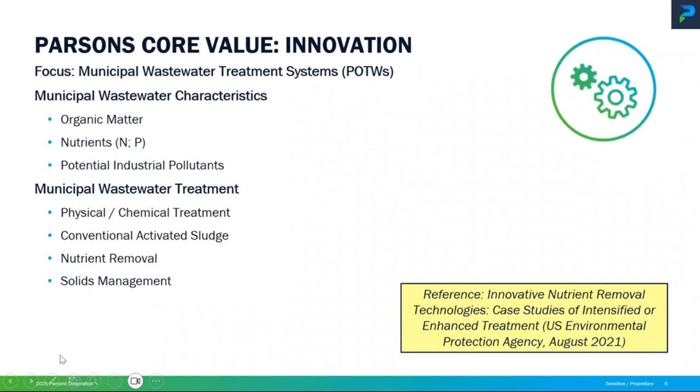Some of the innovative developments in wastewater treatment are listed here: water reuse. Parsons has been involved with significantly large water reuse projects, I believe one out in Los Angeles where water is a scarce resource. So something like water reuse does provide substantial environmental and societal benefits.

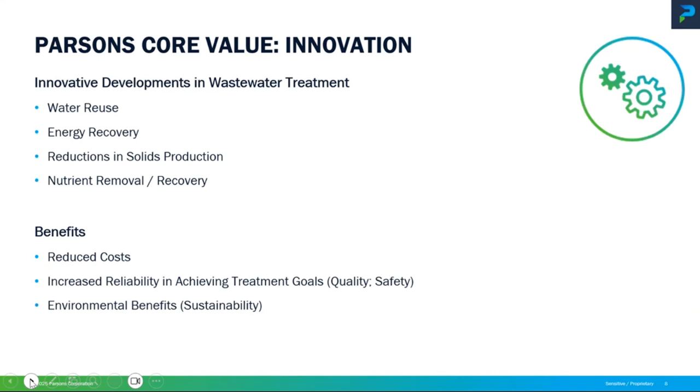Just a brief example of innovation in municipal wastewater treatment: it has to do with nutrient removal. Nitrogen typically comes in the form of urea or ammonia. Processes which deal with these include nitrification, which is an aerobic biological treatment process. So if the system is already treating the wastewater biologically to knock down the organic content, you could also have the system designed and operating to knock down ammonia using aerobic processes.

That, of course, means you have to supply oxygen. Nitrification is energy intensive. It generates sludge because of the bacterial growth, and it consumes alkalinity, which means you have to monitor your pH and replace caustic, for example, to maintain your pH. So that provides a demand on chemical use, specifically something like sodium hydroxide.

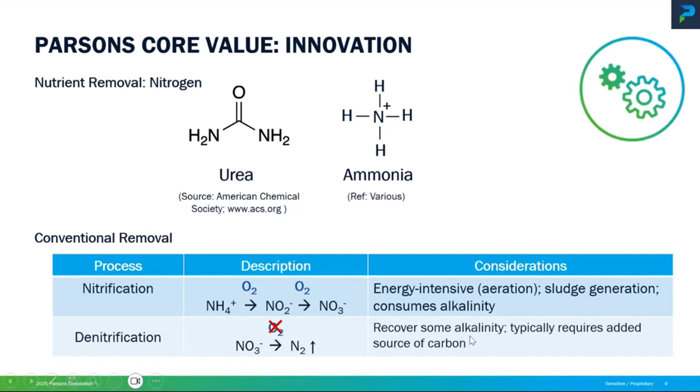Denitrification is another process where, if you have a nitrate limit, nitrate being NO3 minus, you may be required to reduce that. A typical way is through denitrification, where bacteria degrade an organic source, sometimes added, and this is done in the absence of oxygen, converting nitrate to nitrogen gas, which evolves to the atmosphere. One benefit is that you recover some alkalinity, and sometimes that can drive inclusion of a denitrification process in your treatment system.

So I've been demonstrating that nitrification in particular is an aerobic process. Aerobic treatment, or energy in general from municipal treatment, can consume up to a third of a municipality's total energy bill. So that wastewater treatment plant down the road may use up to a third of the entire town's energy for all their needs. The energy used for the aeration process within that treatment system is about 40 to 70%, and it may be towards the higher end of that range when you have nitrification.

One innovative process I found in that reference is called anaerobic ammonia oxidation, or Anammox. As shown before, the nitrification process is energy intensive to provide oxygen, converting ammonia to nitrite and then into nitrate. What the anammox process is able to do is take a slipstream of this water with the intermediate nitrite and apply it directly to the ammonia. So instead of requiring oxygen to oxidize the ammonia, you're using the nitrite, which actually converts the ammonia directly to nitrogen gas. It's just an example of an innovative process with nutrient removal on a municipal treatment system.

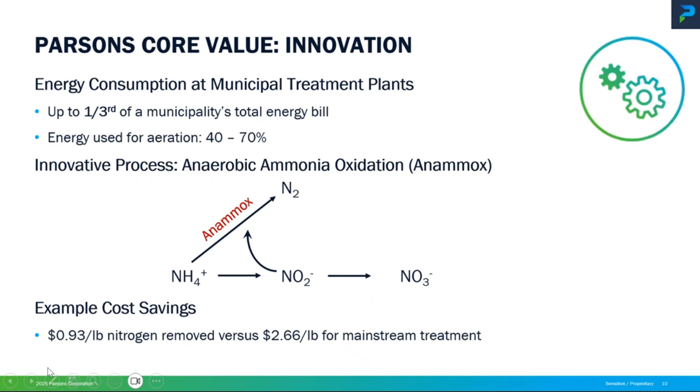So now on to the main topic today, where I'm going to be talking about the retrofit of an existing groundwater treatment plant using native iron to address 1,4-dioxane. I'll briefly introduce the treatment system, talk about the investigation which led to the selection of an alternative to explore for treating 1,4-dioxane within the existing treatment plant, how this was implemented at full scale and demonstrated during startup and operation, and then we'll end with a Q&A session.

So just a brief introduction. The groundwater treatment plant is located in New Jersey. It was not designed by Parsons, but by the previous client's primary consulting firm. Parsons was awarded the contract with the client and took on managing the construction of the treatment plant in 2010. The plant construction was finished in 2011, and then Parsons was tasked with starting the plant up, which we did in late 2011 and into 2012.

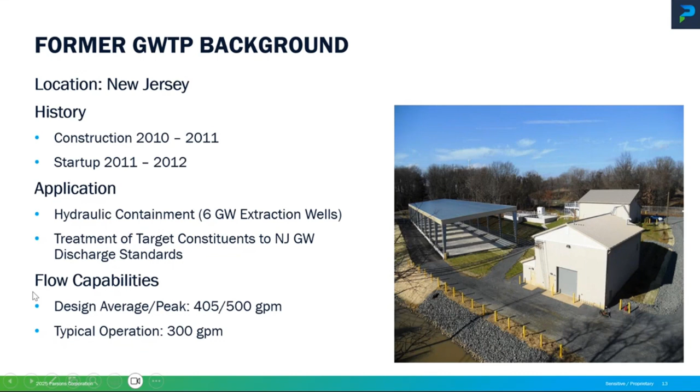The target constituents for which the plant was designed include nuisance and target metals, so this includes iron - they have a fairly large iron load from the groundwater. They also are beholden to treat aluminum, manganese, and arsenic. They treat vinyl chloride, and they treat perfluorooctanoic acid, or PFOA.

So I show a block flow diagram of how the treatment system operates. The flow from the extraction well, the pH is raised, and it's also aerated, and this is to oxidize the iron to allow it to precipitate. This water with the oxidized iron then goes into a chemical mix floc process, and then a plate settler where the pH is further raised to make sure the iron is completely precipitated. Then you hit it with a polymer to agglomerate those precipitated solids, and allow them to settle.

The solids are managed through the sludge underflow, which is pumped to residual settling basins, and then they're managed further from there. I won't get too much into that beyond for the rest of this presentation, but just wanted to point that out. The treated water proceeds through this.

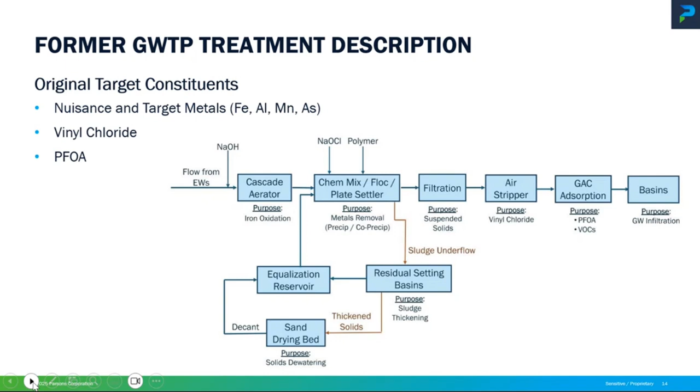So as I mentioned, the treatment plant was designed and built in 2010, 2011. Around 2015, New Jersey established an interim groundwater quality criterion of 0.4 micrograms per liter for 1,4-dioxane. Now, we talk a lot about units and concentrations for emerging contaminants, and they tend to be very low. 0.4 micrograms per liter is also approximately 0.4 parts per billion or 400 parts per trillion. One way to visualize that is if you think of a cubic centimeter as 1 milliliter, it would be that volume in a box 10 meters on a side. So that's what 1 part per billion would be, and the standard is now 0.4 parts per billion.

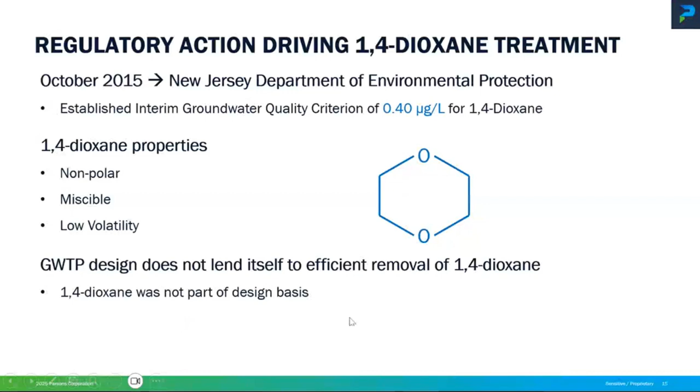1,4-dioxane properties - this is the structure of the molecule. It's nonpolar, it's miscible, so it's completely soluble in water. It also has low volatility. The treatment plant was not designed specifically for 1,4-dioxane, and as it turns out, the unit processes that do exist would not really lend themselves to treating it. I'll get to that in a moment.

Average total iron was about 50 milligrams per liter, most of which was soluble. Typically, when extracting groundwater with soluble iron, it's usually in the ferrous form, a valence state of +2, which is less oxidized than ferric, which is Fe +3.

One more thing I want to mention is that we also measured bromide, and I'll get to why that's important in a moment.

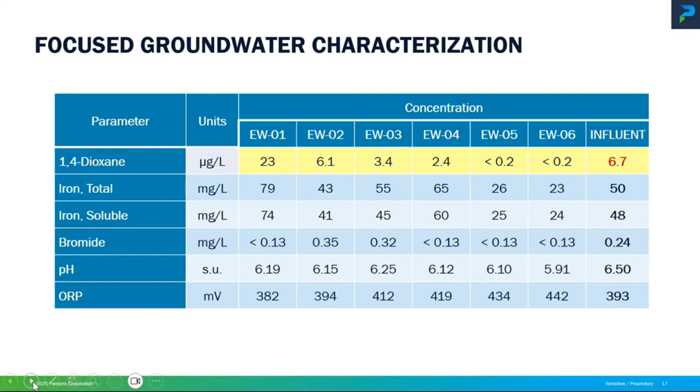So we basically did a tabletop exercise to consider different technologies which may address 1,4-dioxane. Some conventional treatment processes we considered included air stripping, because there was already an air stripper there, but because of the low volatility of 1,4-dioxane, that wasn't going to be an option.

1,4-dioxane is somewhat sorbable to GAC, but not nearly enough that you could use that as a reliable treatment process. Even though the system already has GAC, that wasn't a reliable means. We were able to do projections showing that 1,4-dioxane would have broken through within a week or two of replenishing the carbon, so that wasn't an option.

Biological treatment is a demonstrated means in certain situations for treating 1,4-dioxane. Parsons actually operates a treatment plant out in Denver, Colorado, where biological treatment is used to treat 1,4-dioxane. But it just so happens that in that particular location, there's a co-metabolite present, I think it's tetrahydrofuran, which allows the 1,4-dioxane to be treated co-metabolically. That certainly wouldn't be the case in our location here.

Also, probably more importantly, biological treatment would likely be a bit more complicated than necessary, especially when we're trying to wedge it into the existing treatment plant.

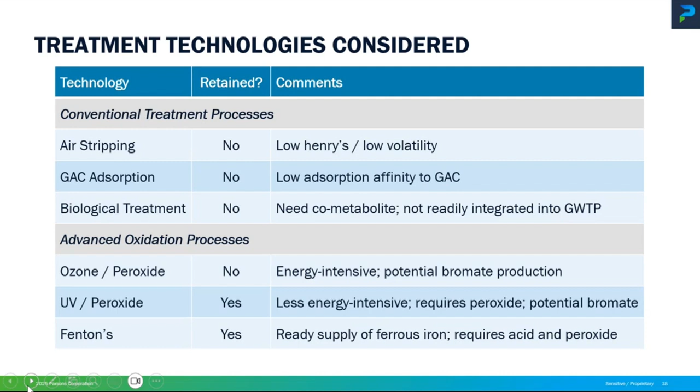Just a brief summary of advanced oxidation processes: we have hydrogen peroxide, H2O2, coupled with either ozone, UV, or ferrous iron, forming hydroxyl radicals. These are highly oxidative, and when generated and released into a water stream containing organic constituents, the hydroxyl radicals will attack those organic constituents.

The Fenton's reaction in particular is typically conducted at pH 3 to 5, hence the need to add sulfuric acid at the front end of the treatment process.

Ferrous iron, Fe plus 2, plus the peroxide, generates the hydroxyl radical, and in so doing it oxidizes the iron to Fe plus 3. So instead of having to aerate the water, you now have hydrogen peroxide doing it for you, getting a secondary benefit—it basically kills two birds with one stone.

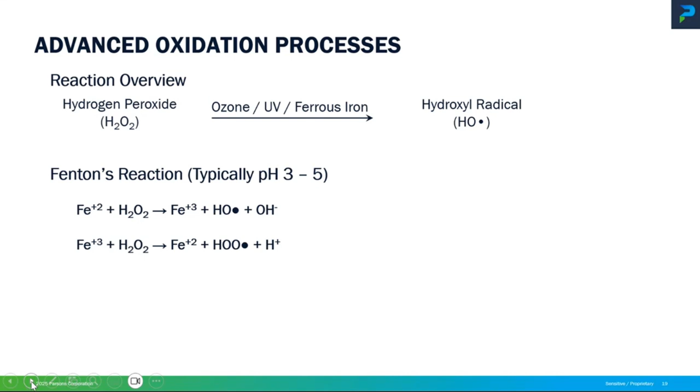You're getting the Fenton's reaction to occur, generating the hydroxyl radicals, but you're also getting the iron to precipitate, which is what you need to do anyway to remove it. The iron then, when it reacts with peroxide, regenerates a ferrous iron and you get what's called a hydroperoxyl radical, which provides additional oxidative capacity for going after the organic pollutants you're trying to treat.

I mentioned this potential for bromate formation due to the presence of the hydroxyl radicals. There's a whole series of transformations which I decided not to show—I just wanted to mention that bromate does form in these types of systems, depending on, well, it's really site specific.

Now, why is bromate a concern? Well, it is a suspected carcinogen, and there is a federal maximum contaminant level of 10 micrograms per liter. This has come up on previous projects Parsons was associated with, specifically for 1,4-dioxane.

There was a treatment plant out in Arizona where the plant already had ozone peroxide installed, and we were tasked with optimizing that process to reduce bromate, because bromate was on occasion pushing that 10 microgram per liter MCL. So based on that experience, we were on the lookout for it potentially forming here.

So now that we selected our two candidate advanced oxidation treatment processes, we proceeded to bench scale treatability testing to validate the concept for our specific wastewater matrix.

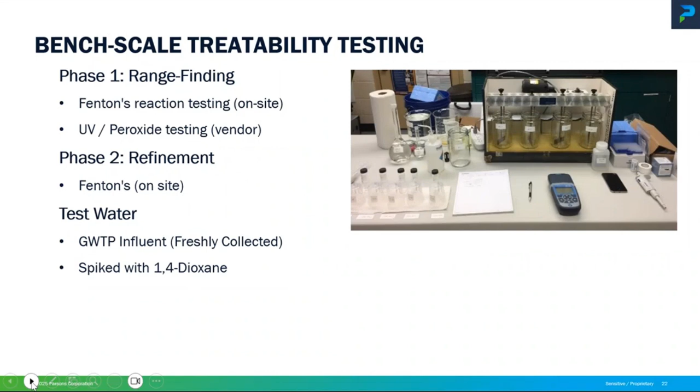This is just a summary of the results from our phase 1 bench scale Fenton's testing. Let's go through each of these columns. In the leftmost column, we're showing the peroxide dose in milligrams per liter, and we went kind of high for the initial demonstration. We tested within this range. We tested pH at 3 without supplemental iron, and then we did some tests where we added supplemental iron just to see if it made a difference. And then we repeated these tests at a higher pH of 5, with the same 2 scenarios, where in some tests we just relied on the background iron, and in some tests we added supplemental ferrous iron.

Results are summarized here. We were looking at 1,4-dioxane, the spiked concentration being around 60 or so micrograms per liter. At these relatively high peroxide doses, we were able to treat it down to non-detect when we tested at pH 3, whether or not we added supplemental iron. So that was a good initial sign. The tests we ran at pH 5 actually had detectable dioxane concentrations above that interim criterion of 0.4 micrograms per liter when run without supplemental iron. Although when we added supplemental iron, we were able to show it was non-detect.

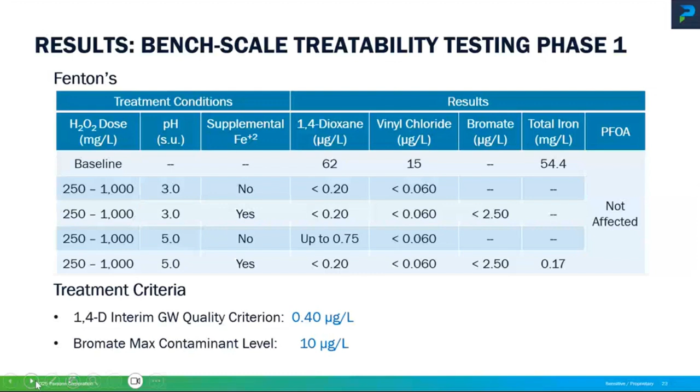Also, during phase 1, as I mentioned, we had a vendor do some UV peroxide testing. They tested a range of intensities, shown in millijoules per centimeter squared, up to 4,000. The peroxide dose in these tests, I believe, was 15 milligrams per liter, based on discussions with the vendor about the appropriate dose for this type of test. Under those conditions, the influent dioxane, again spiked into the water, was around 52 micrograms per liter. The water we sent to them for these tests had already had the iron removed, so we weren't sending them a bunch of iron-laden water that would all come out of solution.

So basically, the concept would be that if UV peroxide was used, it would be applied after the chemical precipitation and settling process. So we sent water representative of that point in the treatment system. Even at the highest UV intensity tested, they still had a dioxane concentration of 1.4 micrograms per liter. Now, granted, our influent likely wouldn't be at 52 micrograms per liter, but even scaled to the worst case scenario, there was a possibility we would occasionally be above the 0.4 microgram per liter criterion. Vinyl chloride was reduced to non-detect in their tests. There was some bromate formation at the higher dose — it didn't push past the 10 microgram per liter MCL, but the fact that it formed, and at a pretty decent percentage of that MCL, was also a reason for pause.

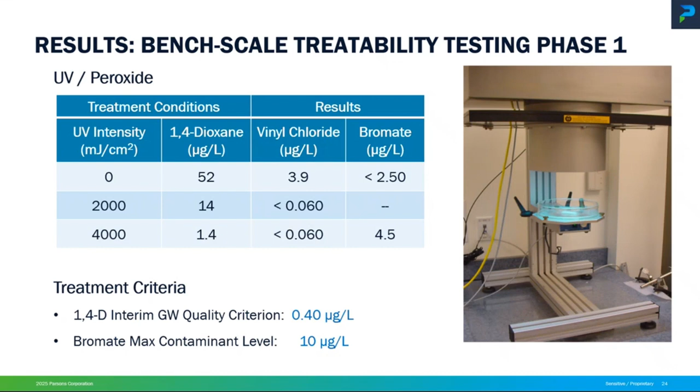So for phase 2, we proceeded with Fenton's testing alone. In these refined tests, we looked at lower peroxide doses. We also took reaction time as an important variable, because reaction time would translate into the size of a reaction vessel that you would ultimately need. So we wanted to capture that in our bench scale testing, because that would help us design a pilot system, a pilot test.

So in all our tests, I believe we ran these at pH 3, because those were the tests in our phase 1 tests where we did not have to add any supplemental iron. So we kept our testing at pH 3 for this test, relying only on the background iron. In all our tests, again, we spiked 1,4-dioxane.

We had an influent concentration of about 34. It was non-detect in all the tests we ran, so at the lowest dose, regardless of the reaction time. And again, we showed vinyl chloride was reduced to non-detect. So the summary here is that we treated both 1,4-dioxane and vinyl chloride to below detection at the lowest test dose and reaction time.

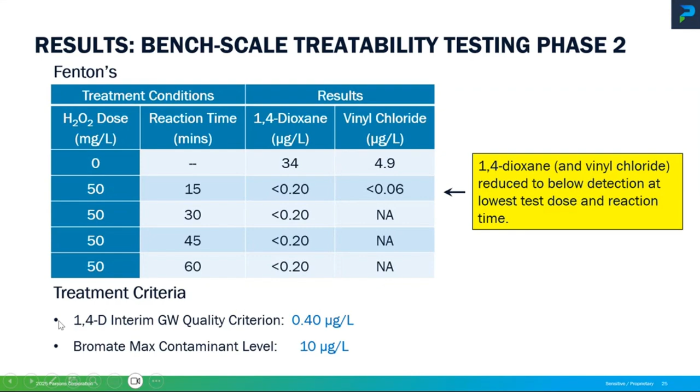So now we're moving on to pilot scale testing. We wanted to demonstrate this process operationally.

The unit processes, or the sub processes you could say, for this included a pH adjustment tank. That's the first tank, where sulfuric acid was added to reduce the pH down to a target of around 3. Then in the second tank, peroxide was added to effect the Fenton's reaction. And in the third tank, we had a pH readjustment step, and this is also where a lot of the iron came out and settled out.

The test variables for our pilot test included peroxide dose. Since we had demonstrated effective treatment during the second phase of bench testing at 50, we decided to go even lower. We had the opportunity to try several different scenarios.

We also were able to show a range of reaction times. Here again, we showed that 15 minutes had worked, so we did some tests where we reduced that reaction time down to even 5 minutes.

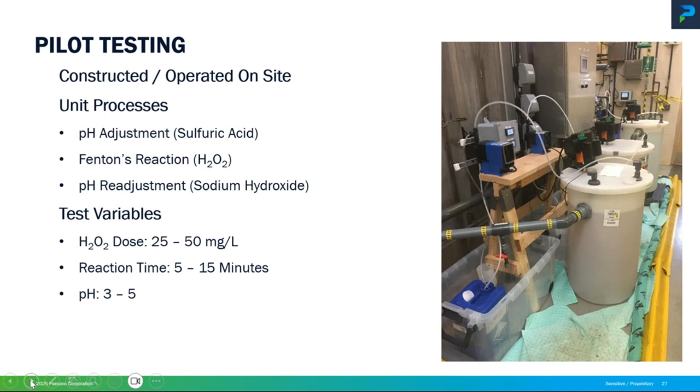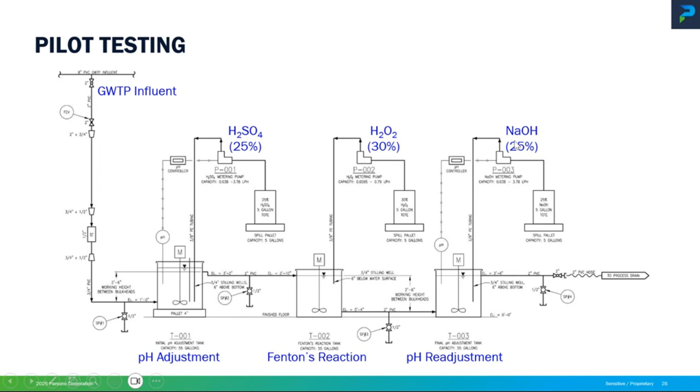Now the influents were a lot lower, even lower than what that average influent concentration would have implied, but they were still high enough to demonstrate treatment. They were still well above that interim criterion of 0.4 microgram per liter. So in our first test, we showed non-detect, and then again with vinyl chloride, which we're also monitoring, that went non-detect.

Lowering the peroxide dose while keeping the hydraulic residence time the same: same story for 1,4-dioxane. It went down from around 1 or so microgram per liter down to non-detect, and vinyl chloride, which we measured in some of these tests, went down to non-detect as well.

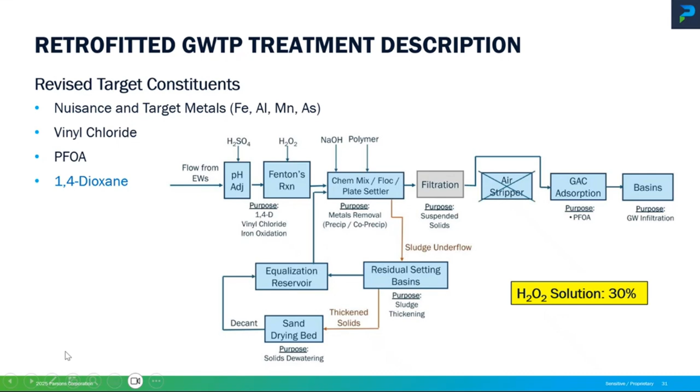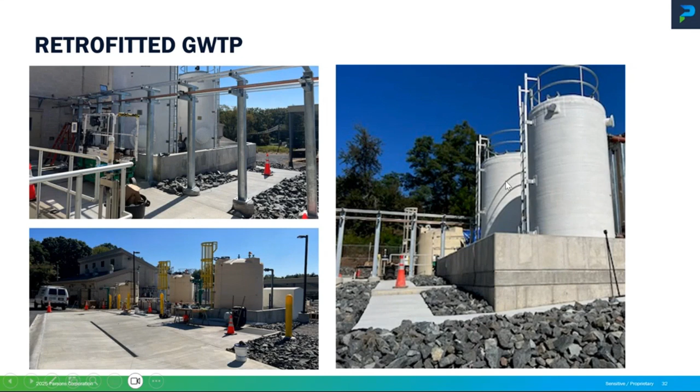Just another perspective, going right to left, is the pH adjustment and the Fenton's tank. The picture on the right shows the new chemical storage and metering that was built. Initially the plant had storage, metering, and secondary containment for sodium hydroxide. Now the chemical storage area includes dedicated walled areas for both the sulfuric acid and the hydrogen peroxide, and there are controllers in these boxes for the pumps so you can add those chemicals at the points where they need to be added.

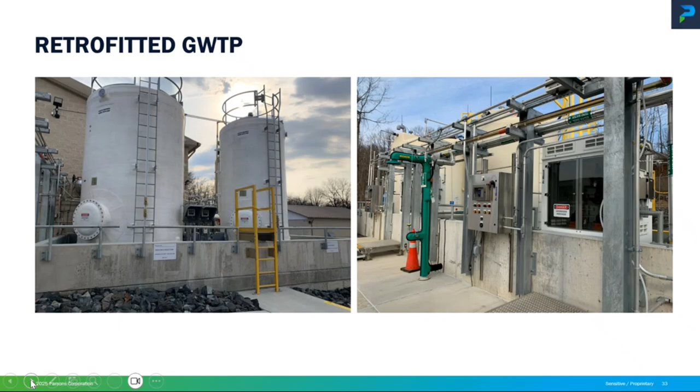So now I'm going to talk about startup and operation. The treatment plant was down, I believe, during the entire construction phase while the Fenton's process was being installed. This took place in, I believe, the spring and summer into the early fall of 2023.

Once that was completed and all the commissioning was done, we went to the startup phase where the plant was restarted, now including the Fenton's process. The startup test duration was a 2-week test period to demonstrate that this would work in real time, with the real treatment plant and real water. The procedure included running the groundwater treatment plant as before, with a number of the extraction wells online, and we ran it 4 to 8 hours per day.

The treatment conditions applied included a peroxide dose of 25 milligrams per liter. We were confident that was going to be a good starting point; we wanted to start low, and if that wasn't effective we could increase it up towards more like 50 milligrams per liter. We also decided to start the pH, instead of going all the way to 3 right off the bat, with a set point of pH 5 in that first tank. As it turns out, adding the peroxide in the second tank reduces the pH further, which gets you into a more reliable range to make sure the Fenton's process is working reliably.

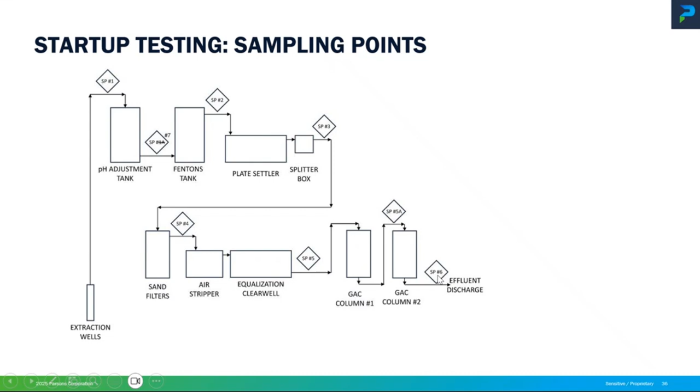This is our daily sampling schedule, so I'll show the different sampling points. There's different terminology depending on which source you're using, but sampling point 1, 2, 3, 4, 5, 6, and then 7 is between the two Fenton's tanks.

We did a number of analyses on site, including pH, and we were measuring the residual peroxide, as I'd mentioned. We also were just looking at metals just as a process control analysis. But we also had commercial analyses for 1,4-dioxane and vinyl chloride to give us our hard performance data. We also wanted to track metals at a couple locations just to show what was going in and what was coming out. And then we also looked at TOC as well, just because that was a potential that could place a demand on the peroxide.

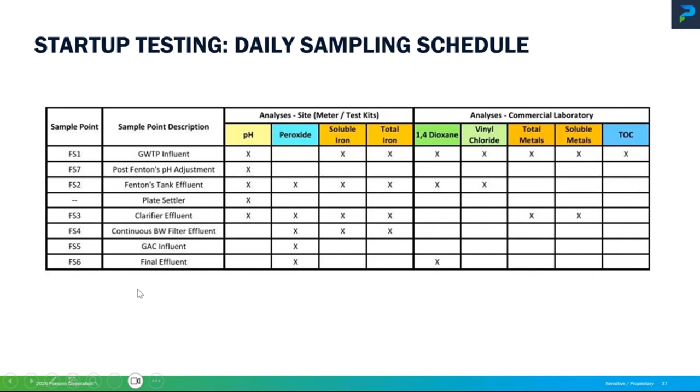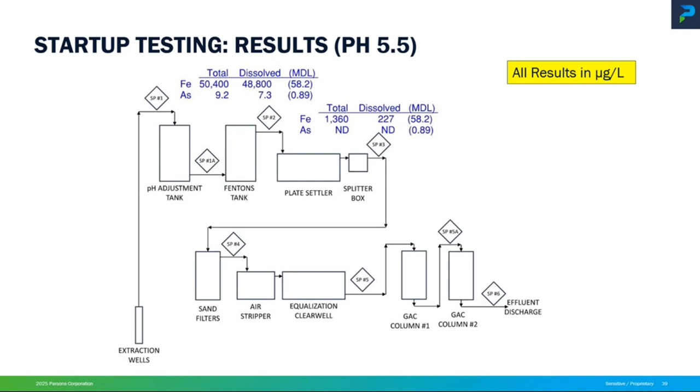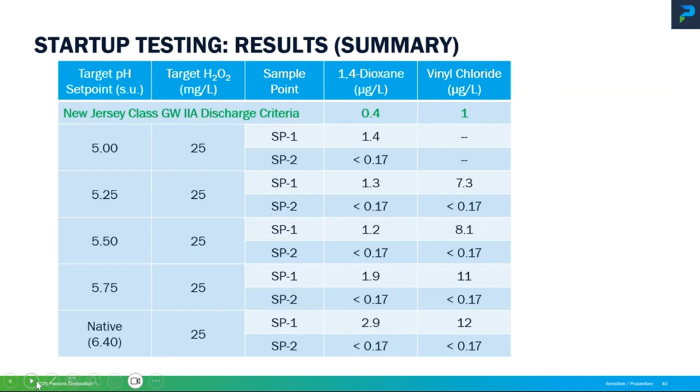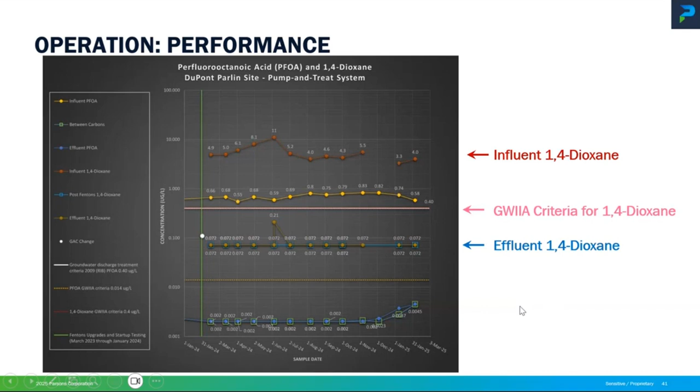Just a few observations. As I mentioned, it's reliably achieving 1,4-dioxane removal down to below that interim discharge criterion. An unexpected benefit, I guess you could say, was that there's also been a reduction in sludge generation. I don't have any theories as to why that's the case, but it's an observation.

Another nice thing that has happened is there's been a significant reduction in the frequency of GAC backwashes. It used to be sometimes there would be a backwash required as often as once per day, depending on conditions. Now we're looking more like at a weekly to even less frequent backwash. Again, we don't know the exact reasons. It could be due to a reduction in organics because the Fenton's process is taking care of it - if it's treating the 1,4-dioxane and vinyl chloride, it may also be reducing other organics that might otherwise have been available for microbial growth in those GAC adsorbers. It could also be due to the fact that we changed the polymer. So anyways, long and short is that we are seeing less need for backwashes.

Now, there is an increase in the overall chemical use. We did have to add sulfuric acid and hydrogen peroxide, and so there was a cost involved with that. And then we're also increasing the use of sodium hydroxide to readjust the pH following the Fenton's process to get it to discharge criteria and to precipitate the iron.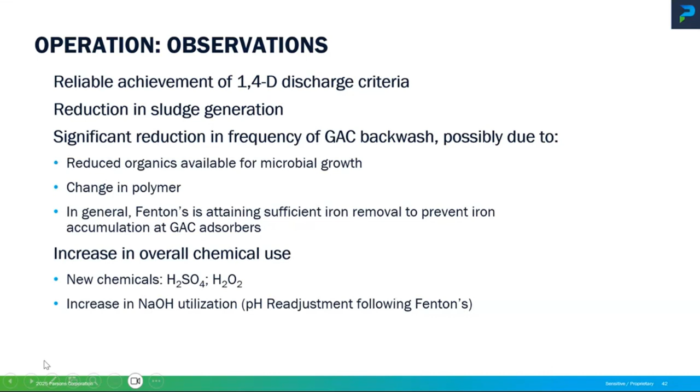So in conclusion, the Fenton's reaction was successfully integrated into the groundwater treatment plant. It required very few physical alterations. Like I had shown you, we removed one process and just put those two tanks in there as a replacement. So physically it fit seamlessly into the existing treatment plant, and it provided a relatively uncomplicated means to address 1,4-dioxane versus having to have a UV or an ozone system, which would have been probably a lot more complicated and expensive.

So the benefits: we were able to demonstrate effective treatment without the supplemental iron. As I mentioned, it's a relatively seamless integration into the existing treatment plant. Definitely cost effective and simpler compared to the other advanced oxidation processes. Also, we're able to avoid bromate generation that sometimes plagues, especially ozone peroxide treatment. As I mentioned, there's reduced sludge generation and reduced GAC backwash frequency.